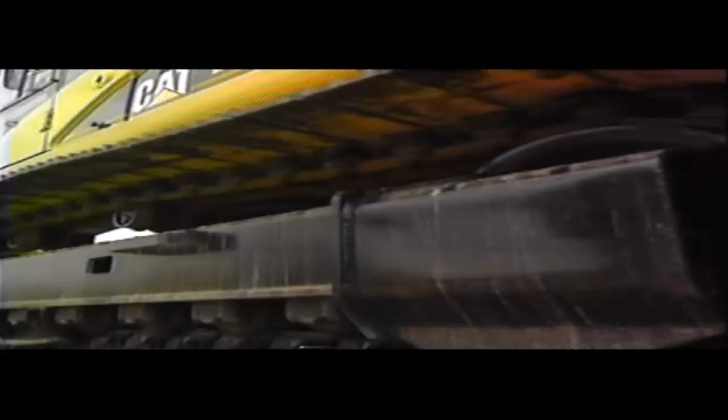Máquinas modernas. Nosso mundo industrializado depende da hidráulica. Mas ela é tão fundamental em nosso modo de vida que mal a notamos. Ela nos levou do Modelo T ao carro moderno, de Kitty Hawk ao Raptor F-22. Ela nos dá força para levantar, guiar e conduzir as escavadeiras que extraem recursos preciosos da terra, e é o segredo por trás da maquinaria que fabrica a estrutura de nossas cidades. A hidráulica nos transporta, nos diverte e até recolhe o nosso lixo.

You look at a lot of applications and we see hydraulics. You think about a car going down the street, of course you have hydraulic power steering, hydraulic brakes. A lot of the roofs on those cars, the convertible tops, are all hydraulic controlled. Get into aircraft, all the control surfaces. Amusement parks, a lot of the rides today, there's hydraulic powered roller coasters.

Go 0 to 120 in 4 seconds.

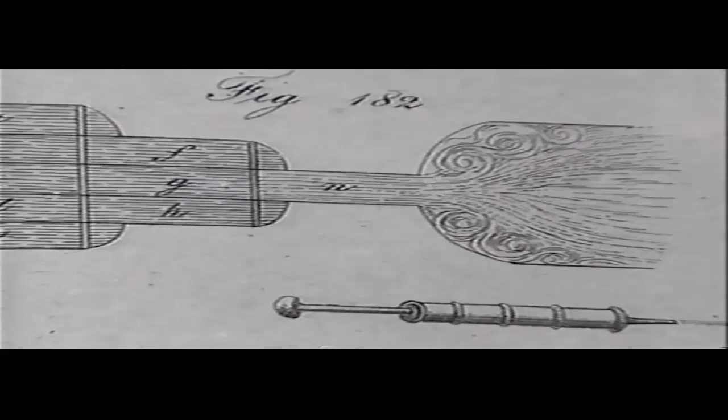A hidráulica é o ramo da física que estuda o comportamento de líquidos em repouso ou em movimento. O movimento dos líquidos é chamado de hidrodinâmica. Engenheiros civis usam essa forma de hidráulica em usinas de energia hidroelétrica, manipulando o fluxo de líquido para impulsionar turbinas. Essas usinas fornecem eletricidade para mais de 1 bilhão de pessoas no mundo.

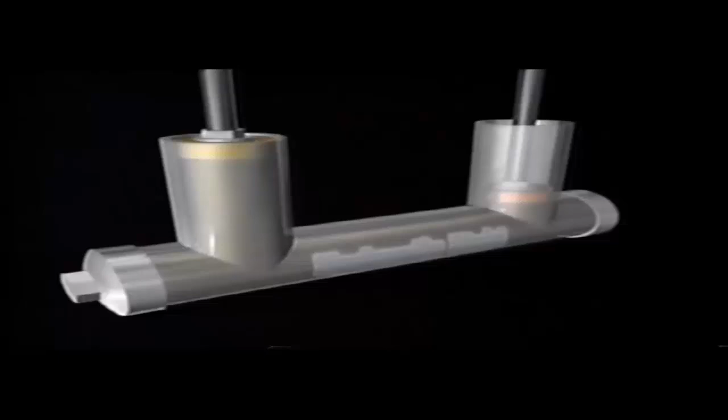O segundo tipo de hidráulica, líquido em repouso, chama-se hidrostática. Engenheiros mecânicos usam essa forma de hidráulica para produzir força através da pressurização de líquidos incompressíveis. Se você tem 2 pistões em um sistema hidráulico fechado, qualquer força aplicada ao pistão A será completamente transferida para o pistão B. The power of your blow is transferred to the other plunger by hydraulic transfer of power.

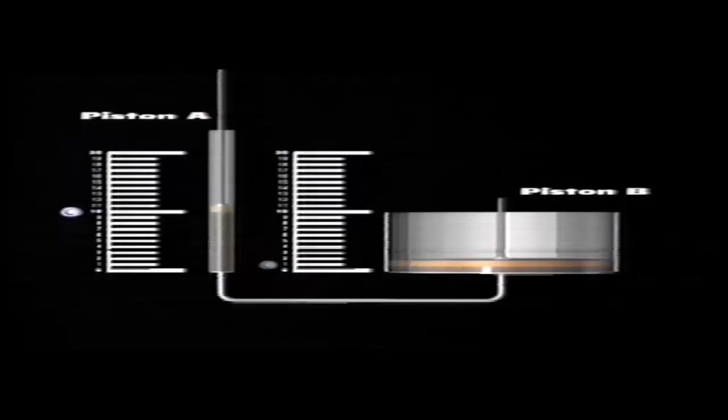Uma das vantagens de um sistema hidráulico fechado é a possibilidade de multiplicar a força. Se o pistão B tem uma área de superfície 10 vezes maior do que o pistão A, o pistão B deslocará uma unidade para cada 10 unidades do pistão A, mas com força 10 vezes maior. Portanto, 50 kg de força aplicada ao pistão A fornecerá pressão suficiente sobre o pistão B para mover um objeto que pesa 500 kg. Notável em sua simplicidade, a multiplicação de força hidráulica é impressionante em sua capacidade, e é o que dá força bruta para quase todas as máquinas grandes.

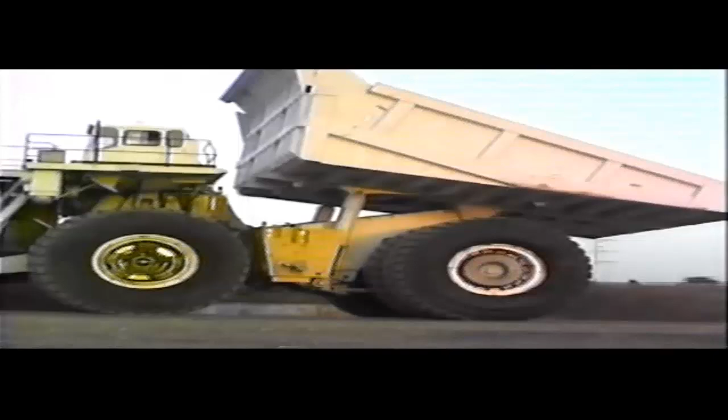In most people's mind, they consider hydraulics the application of high-pressure fluids, generally speaking, to move large amounts of weight and generate a lot of force.

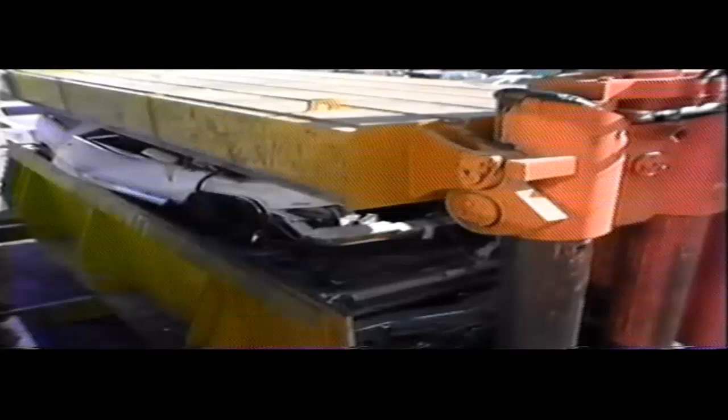Some of the more impressive applications of hydraulics are just pure raw hydraulic force. You look at car crushers as an example. It's unbelievable. You take 5 or 6 cars piled vertically and they're smashed to just feet. And you have to say, how is that done? It's hydraulics.

Um dos instrumentos mais comuns que utiliza a multiplicação de força hidráulica é o macaco hidráulico.

When you push the lever up and down, you're actually pushing on a small piston, which pushes hydraulic fluid, and this fluid flows into a larger piston. Say the small piston that you're pushing has a surface area of 1 square inch, but the large piston that's actually pushing up your car, that might have a surface area of, say, 10 square inches. So for every pound of force you push with that lever, the hydraulic system multiplies that force 10 times.

Unfortunately, in hydraulics, like in everything else, there's no free lunch. So you don't get it for free. In order to get that to work, you have to pump 10 times the amount of fluid.

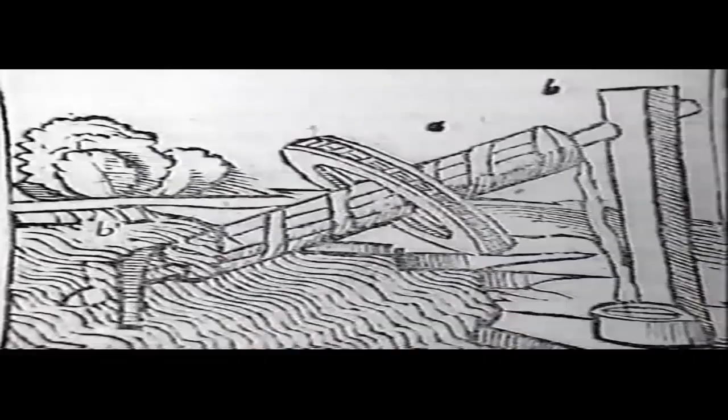Embora os princípios básicos da hidráulica pareçam simples, muitas mentes brilhantes levaram milhares de anos para compreender completamente o poder inerente do líquido. Os gregos, no ano 250 a.C., foram uma das primeiras sociedades a procurar modos de controlar o fluxo de água, inventando muitos dispositivos hidráulicos. Alguns eram criados para diversão, como este que forçava o ar para fora de um pequeno tubo arqueado, produzindo o som de um pássaro. Outros eram mais úteis, como o relógio de água.

O grego que deu a contribuição mais duradoura para a hidráulica foi o matemático Arquimedes, que descobriu o primeiro princípio da hidrostática, a flutuação.

His buoyancy experiment was basically based on the concept that a material that is submerged in water experiences a force against gravity, and that force is known as buoyancy. He also was the same inventor who said, if you give me a lever long enough and a place to stand, I can move the earth. Fundamentally, that's the principle of levers. And realistically, that's what we're doing with hydraulics on a daily basis.

Em 30 a.C., o Império Romano havia cruzado as fronteiras da Grécia, mas em vez de destruir a sociedade grega, os romanos aprenderam com ela, melhorando várias invenções, inclusive a roda hidráulica e o aqueduto.

The Romans realized that they had to feed bigger areas, so they had to have a system where they could carry large quantities of water and at the same time use the concept of gravity.

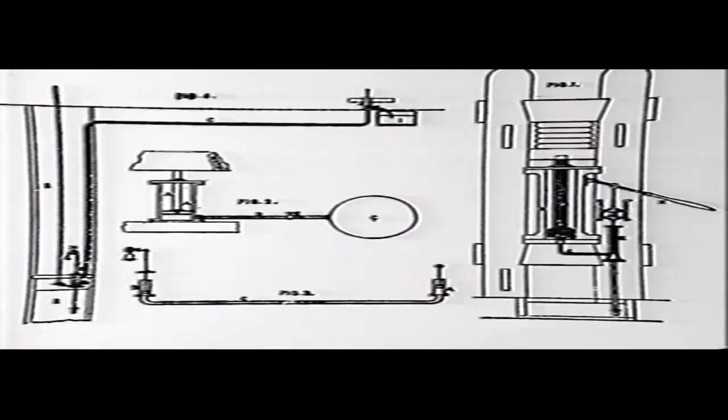When the first hydraulic systems were used around the 1800s, they did use water as the hydraulic fluid. And water does not make a very good hydraulic fluid. Some of the problems it has: it's very thin, so it leaks past your seals. Back in the 1800s, the seals they had were things like leather and ropes and things of that sort. So if they did seal, they didn't seal for very long.

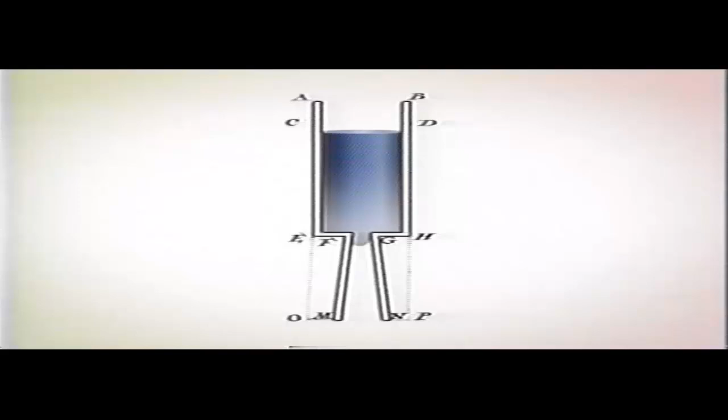The pressures were on the order of 800 pounds per square inch to 1,000 pounds per square inch. It's 1,000 pounds per square inch blasting against raw earth. You clean the soil away in a hurry.

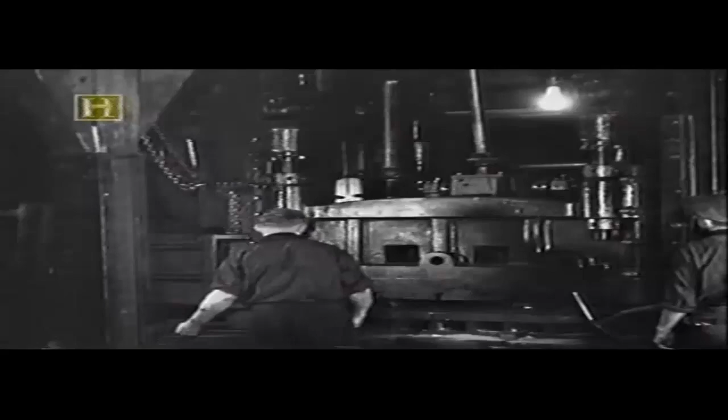Hydraulics played a crucial part in enabling vehicles to transform from the hay wagon type of thing to the ever heavier, ever more comfortable, ever more livable vehicles that we have today.

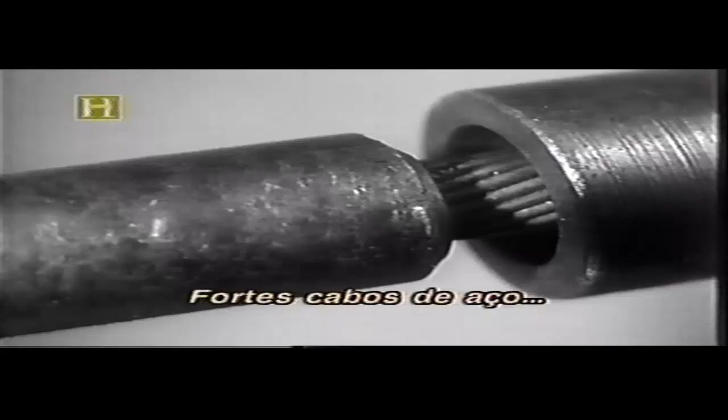Strong steel cables provide powerful, unfailing, and flexible connections between the brake pedal and the brake itself. Of course, as the weight of the vehicles increased and their speed increased, we had to come up with more effective ways to stop these machines.

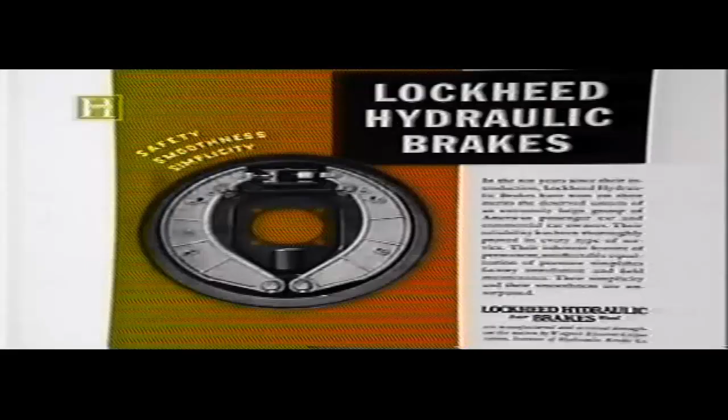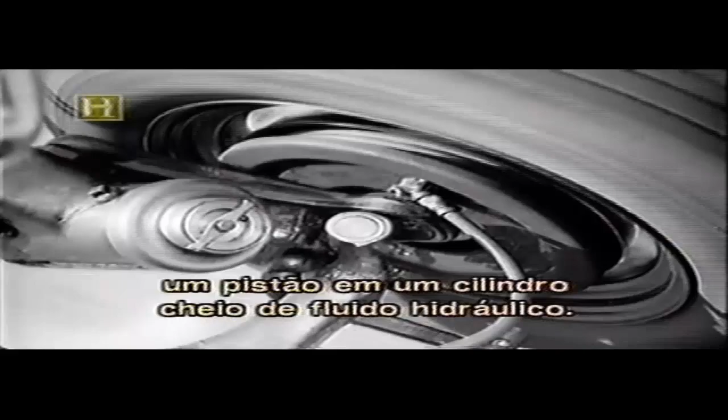The way that the early hydraulic systems for braking worked on cars was your pedal would push on a piston in a cylinder full of hydraulic fluid, and that would push the fluid to each wheel. The fluid would come into another cylinder with two little pistons that push out against a couple of curved shoes that push out onto a cylindrical drum, and when they press on it like that, it creates friction and slows the car down. So suddenly you can transmit a lot of energy to these individual wheel brakes.

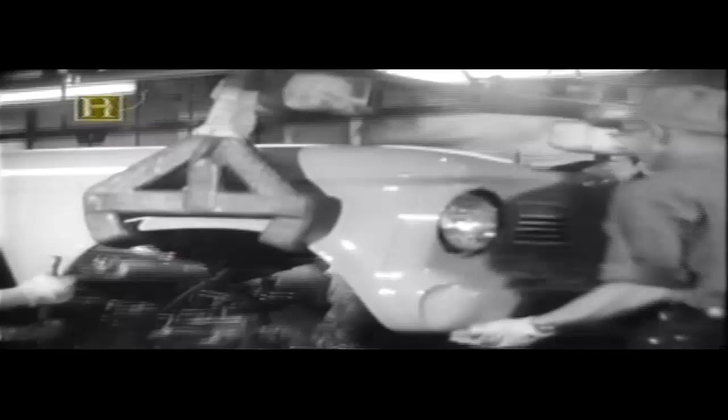Just take a hydraulic pump and have this driven by the engine, and the combination of the hydraulic flow and pressure is what provided the power to turn the wheels to the left or right. If you turn it to the left, all it does is actuate a valve. The valve opens and routes fluid into a piston, which would turn the wheels to the left. So power steering became an absolute godsend.

And the early ones, they wanted to make themselves known. And so your power steering would be totally zero effort. I mean, you could steer these gigantic cars with your pinky finger.

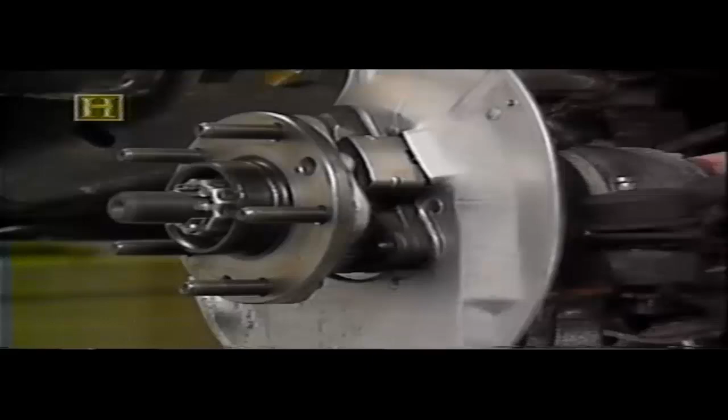Desde o advento da direção e dos freios hidráulicos, seus sistemas permaneceram basicamente os mesmos. Os freios modernos são complementados com o auxílio do vácuo, possibilitando parar mesmo um grande furgão com apenas um toque do pé. A direção hidráulica também possui controle eletrônico que aumenta o fluxo do fluido com base na velocidade em que o volante é girado. Modernas aplicações hidráulicas para o automóvel concentram-se no estilo e no conforto do motorista.

You can suspend a car with metal springs, but you can also put a piston there with hydraulics to get the same type of springing effect.

O cálice sagrado da suspensão é controle ativo de carroceria, encontrado apenas em carros luxuosos como o Mercedes-Benz CL Coupé. O controle ativo da carroceria mantém o carro estável e alinhado, mesmo nas curvas mais fechadas ou na mais irregular das estradas. O sistema funciona colocando-se um êmbolo hidráulico no topo de uma mola de suspensão. Se o carro passar sobre um buraco, em milésimos de segundo, sensores localizados no carro todo ativam o êmbolo, fazendo-o se estender e equilibrar a carroceria.

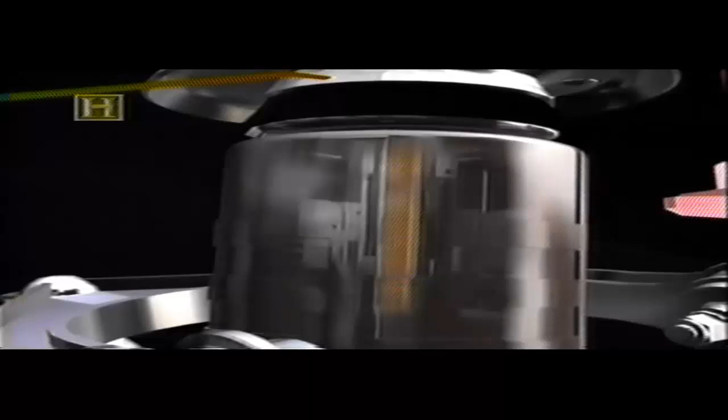Mas talvez sua característica mais extraordinária seja a capacidade de mudar a suspensão. Quer a sensação de um carro esporte? Basta apertar o botão e a hidráulica fará acontecer.

Embora a invenção dos freios hidráulicos e da direção hidráulica tenha ajudado a indústria automobilística, o impacto que essas inovações tiveram na indústria da construção civil mudou a face da Terra.

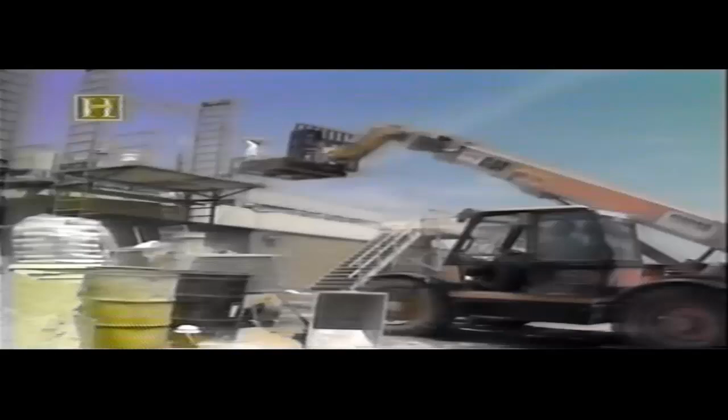O maior exemplo da força bruta que a hidráulica pode fornecer encontra-se na construção civil. Ao longo dos anos, as escavadeiras, guindastes e caminhões que construíram nosso mundo aumentaram de tamanho exponencialmente, alcançando eficiência e força inigualáveis através da hidráulica.

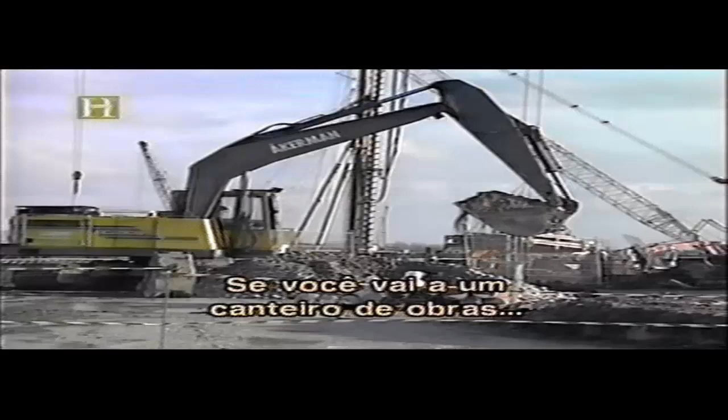If you go to a construction site, you can't help but see hydraulics. It's everywhere. It's in virtually every machine that's on a construction site. And in many cases, probably most cases, it's because there's just no better way of doing it.

Neste armazém, em Youngstown, Ohio, a companhia Robbins dá os toques finais em duas gigantescas máquinas tuneladoras. As brocas têm quase 120 metros e pesam 800 toneladas. Para mover algo tão grande, só havia uma alternativa.

The amount of force we get from the hydraulics far exceeds what we can get from electrics without going into great cost. Hydraulic gives you more force and power, especially in these type of machines. You need that force to cut the rock as hard as it can be sometimes.

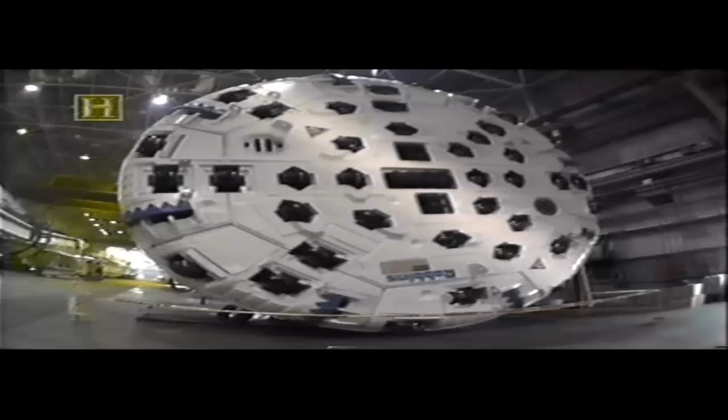Quando a broca é ativada, 3.000 galões de fluido hidráulico percorrem 11 quilômetros de mangueiras para centenas de componentes hidráulicos. O sistema hidráulico é capaz de mover os pistões da broca com 5.000 libras de pressão por polegada quadrada.

When we talk about hydraulic pressure, what we're doing is putting force into a cylinder, which in turn puts force against a given surface.

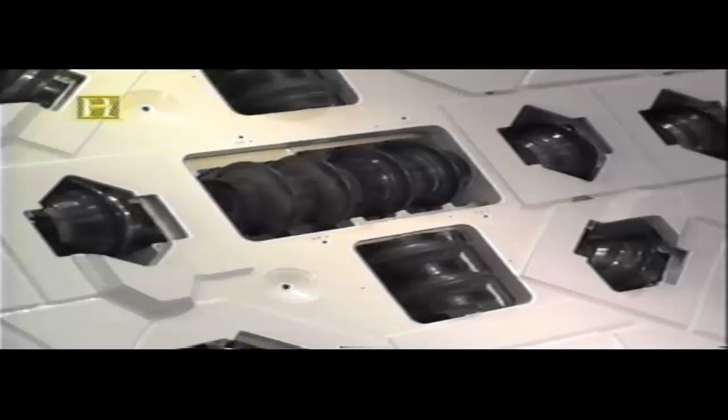Fazendo o corte, uma cabeça com 7 metros de diâmetro, alimentada por 10 motores de 450 cavalos, a perfuratriz tem 46 dentes de 47 centímetros que avançam contra a rocha a um ritmo de 7,5 metros por hora. Embora a cabeça da perfuratriz seja movida a eletricidade, é a hidráulica que torna a perfuração possível.

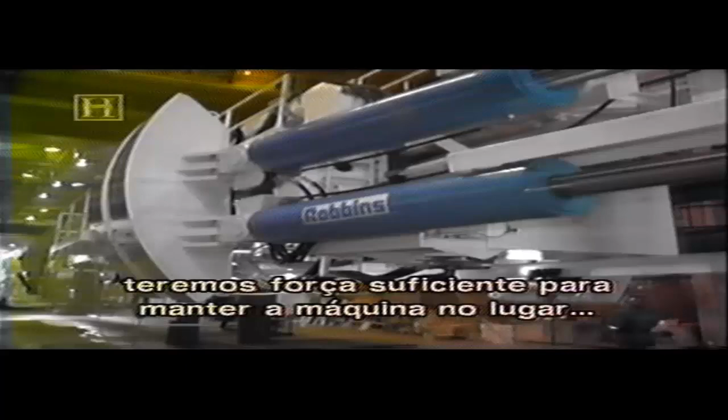Behind me you see some curved items we call a gripper shoe. So if we put 5,000 pounds of pressure on that shoe, that is giving us enough force to hold that machine in place so that it doesn't try to spin in the tunnel.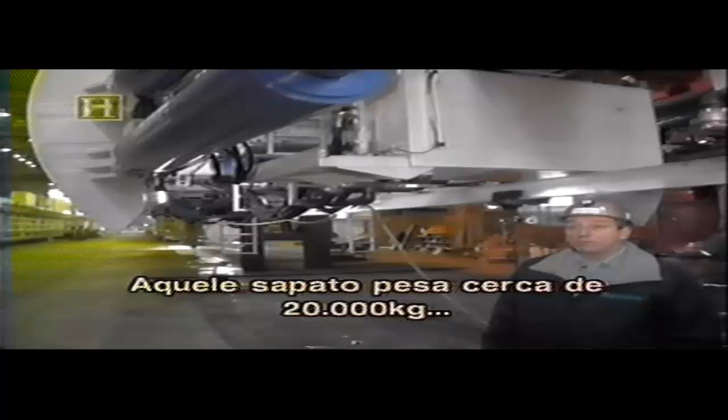A sapata de fixação aplica 2 milhões de quilos de força contra a parede do túnel. Quando a máquina se estabiliza, um segundo conjunto de cilindros se estende, empurrando a broca com uma força de 1,5 milhão de quilos. That shoe weighs about 40,000 pounds, and as it moves very smoothly, as you see, it just shows you how the hydraulics move that kind of weight smoothly and steady.

Após a inspeção, as perfuratrizes gigantes serão enviadas à Islândia para a construção de uma usina hidroelétrica. Incríveis equipamentos de construção, como as máquinas tuneladoras, representam a força inigualável que a hidráulica pode oferecer.

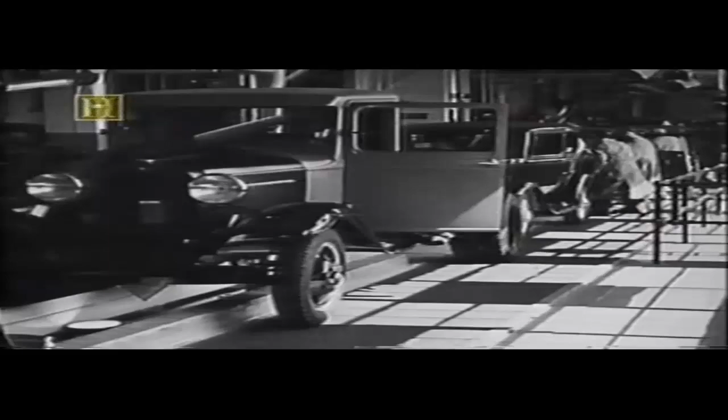Mas a história da hidráulica na construção teve um início bem modesto, com o caminhão de caçamba aberta. Por volta de 1910, ele passou de um simples veículo de transporte para uma máquina que podia carregar materiais volumosos como terra, pedra e carvão.

Colocar esses materiais no caminhão era o trabalho da escavadeira a vapor. E eram descarregados com um sistema mecânico.

The construction industry today relies on the hydraulic cylinder. If you consider the dump truck, the early trucks consisted of a winch and pulley system. The operator had to get out of the cab, wind up this crank to dump the bed of the truck.

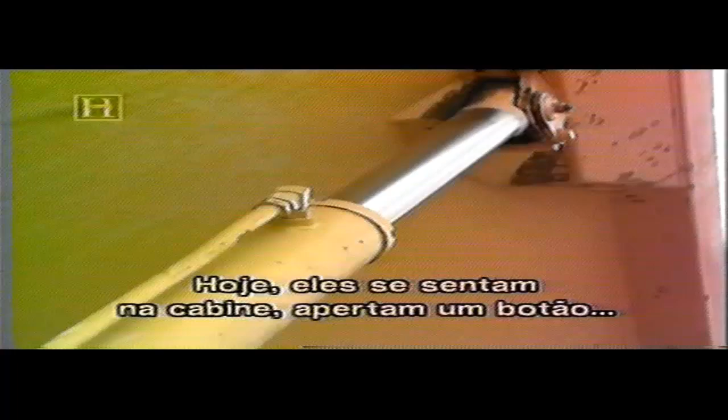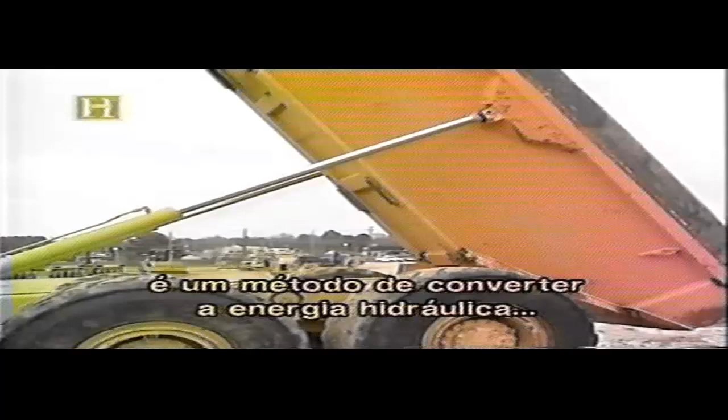Today, they sit in the cab, push a button, the hydraulics extends a ram from the cylinder and empties the bed of the truck. The hydraulic cylinder is a method of converting the hydraulic energy to a workable energy in a back and forth motion. That's really all it does, is it moves in or it moves out.

This is the popular hydraulic type, which operates easily and efficiently under all loads. The end gate is double-acting and is operated by a control nut.

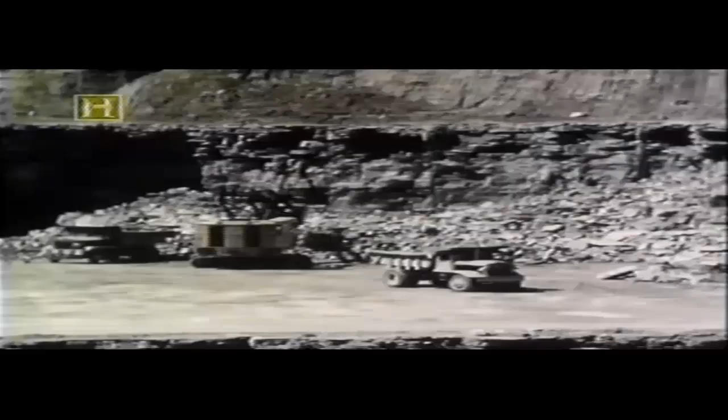The construction industry has to move great quantities of earth. You could have 10 backhoes loading 10 trucks, or you could have one backhoe loading one large truck. And when you did that, you had to move the same amount of earth, so that means the piece of equipment had to be much larger.

The excavator Caterpillar 330 CL. The weight of this arm is in the neighborhood of 10,000 pounds. We'd have quite a bit of problem moving that arm efficiently without the use of hydraulics.

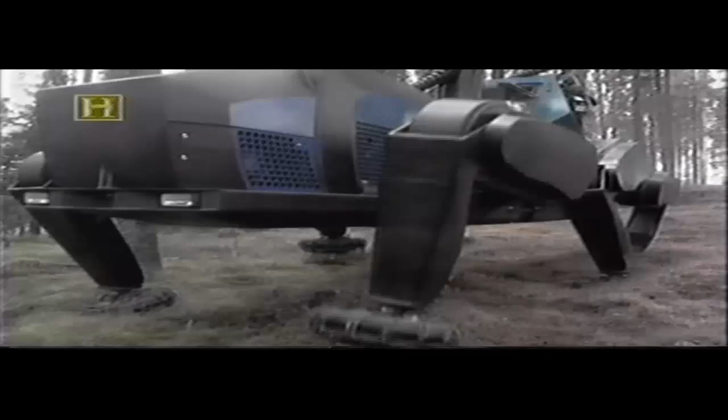Any kind of contamination within the hydraulic system is going to have a devastating effect upon the system itself. The cylinders have a wiper on the end of the cylinder head that, as the cylinder rod retracts, cleans off the excess dirt, so when it extends again, it's as though it were new.

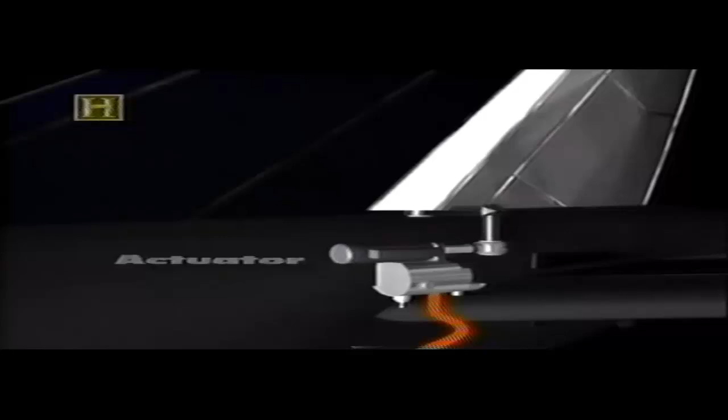The Wright brothers aircraft had no hydraulics on it. Its basis for control was by a lever and cables or pulleys, and this allowed them to have the three axes of control.

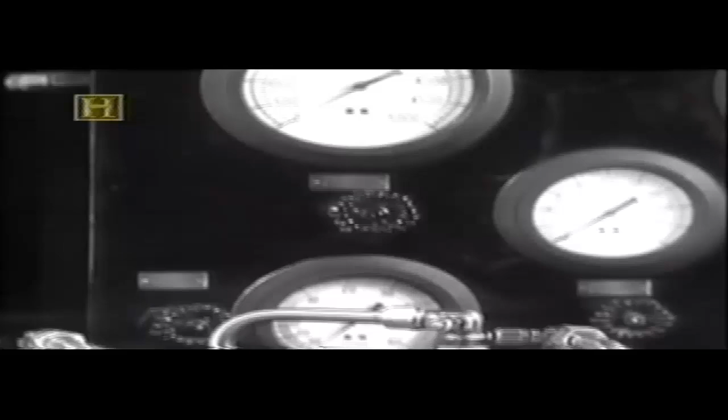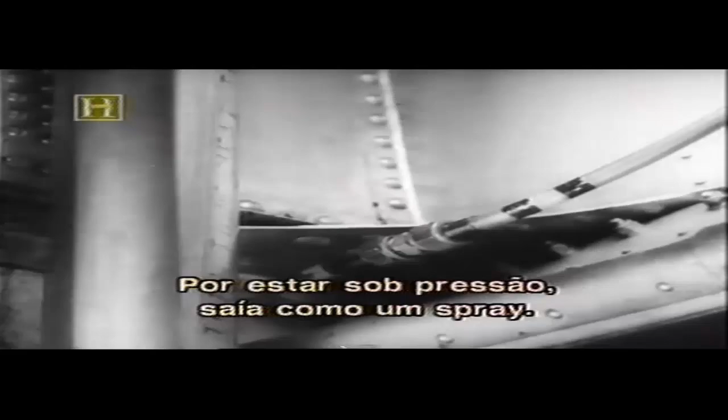If hydraulic fluid would spray onto an engine manifold, it would certainly cause a fire. Many of the fires that you've seen, in general, those were hydraulic leaks that started the fires. Many times a hydraulic leak would not be something you think of with dripping. It's high pressure, so when it leaked out of a hose or a fitting, it would often come out as a spray. If there was a fire already started, the leaking fluid would feed the fire and you'd have catastrophic events.

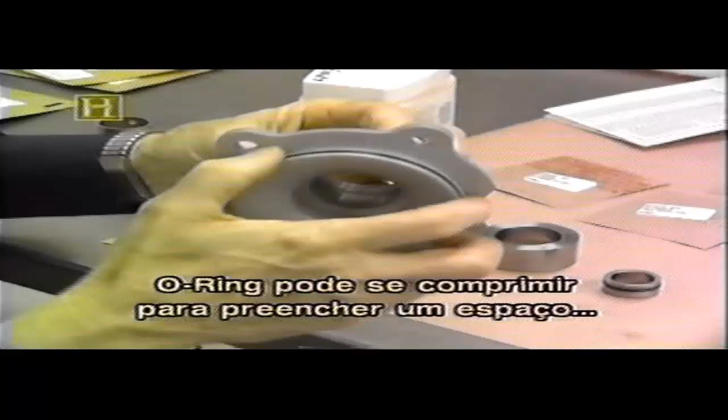The O-ring has a unique ability to be able to compress to fill a space, and it's able to do that very efficiently. It's a donut-shaped piece of elastomer, and it became the seal of choice for most of the products that are in a hydraulic system.

This fluid was a phosphate ester and is still in use today. Phosphate esters are a class of synthetic hydraulic fluids which have very good lubricating qualities. In addition, they tend to be fire resistant.

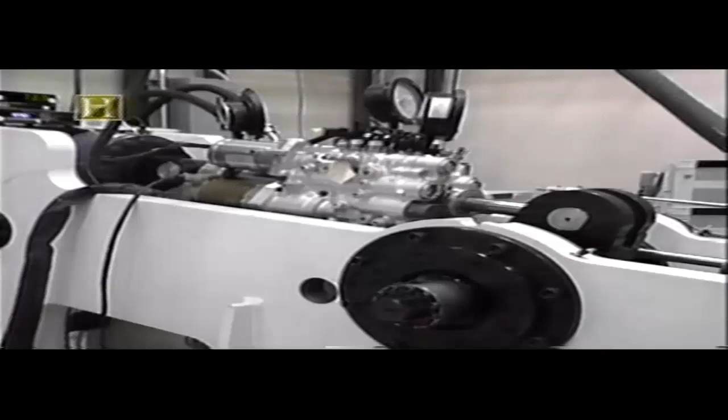O maior avanço da tecnologia hidráulica em aeronaves é o desenvolvimento do AHE, ou atuador hidrostático elétrico. Criado no início dos anos 90, o AHE contém todos os componentes de um sistema hidráulico em um conjunto pequeno.

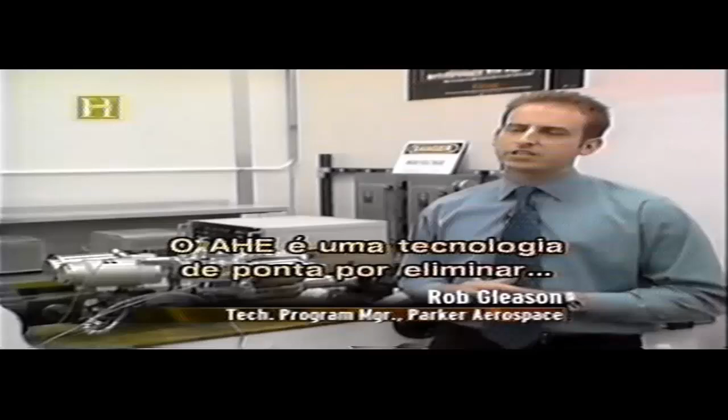Colocando o AHE próximo às superfícies de controle da aeronave, centenas de metros de tubulações hidráulicas e centenas de quilos são removidos. This EHA is considered cutting-edge technology because it removes the distribution elements that are part of a conventional hydraulic system.

There are 2 electric motors that work in tandem. We also have hydraulic reservoirs to capture the thermal expansion and contraction required to power the hydraulic pumps of the system. The linkage here is attached directly to the flight control surface.

A primeira aeronave a usar o AHE no controle primário de voo será o caça F-35.

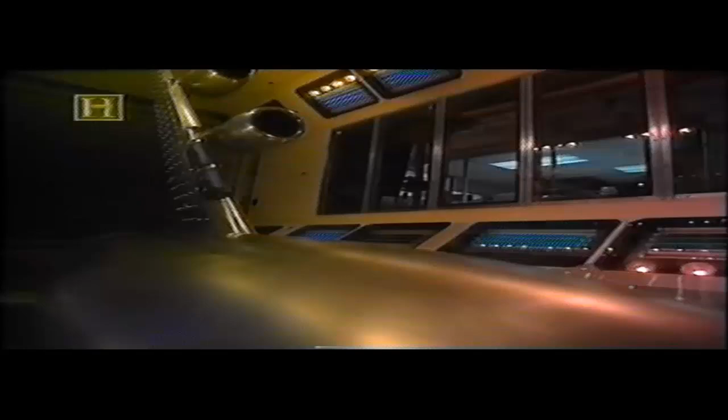A primeira aeronave comercial a empregar o AHE, nesse caso para controle de voo secundário, será o novo Airbus A380. Com 72 metros de comprimento e quase um campo de futebol de envergadura, será o maior avião comercial já construído. A tecnologia hidráulica terá que ser aprimorada para controlar uma aeronave que pesa mais de 300 toneladas.

Certainly, the A380 offered the hydraulic system designer several major challenges. If we were going to use the conventional hydraulic system concept, 3,000 psi, for example, the pumps would be massive, the lines, fittings, and hoses would be massive.

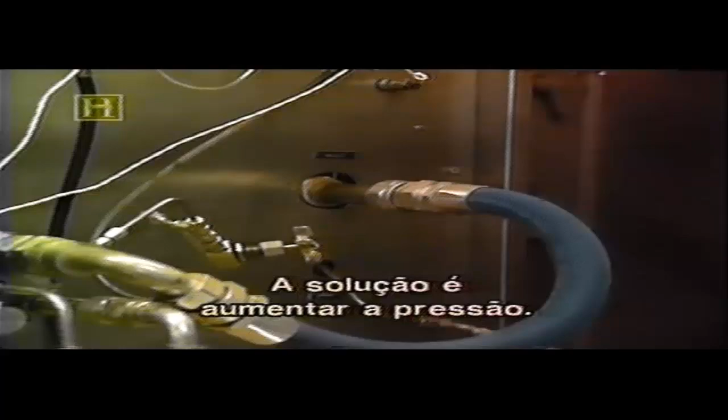A solution to this was to increase the pressure, not from 3,000 to 4,000, but to take it to the next step, 5,000 psi.

Enquanto a indústria aeroespacial continua procurando maneiras de aumentar a eficiência e a segurança dos sistemas de controle de voo, engenheiros investigam a ideia de usar motores elétricos para mover superfícies de controle, eliminando totalmente a hidráulica do controle de voo.

Há, porém, um grande obstáculo à frente. É preciso desenvolver um motor que possa criar a força necessária para movimentar as superfícies com eficiência.

Mas a hidráulica não apenas molda o futuro, ela também dá vida ao passado. A seguir, dinossauros animados com a ajuda da hidráulica.

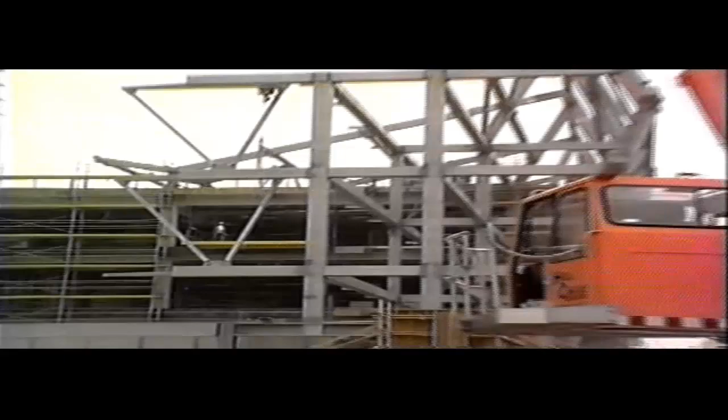A hidráulica não tem um papel apenas em nosso trabalho, tem um papel em nosso lazer também. A Universal Studios, Hollywood, abriga as atrações hidráulicas mais avançadas do mundo. You would not be able to have any of these attractions move this much weight and be this reliable without hydraulics. It just would never happen.

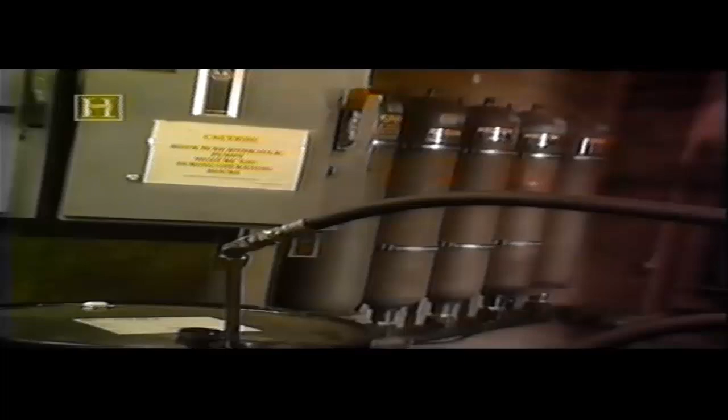Uma das atrações hidráulicas mais complexas da Universal é a simulação de terremoto. Os passageiros que entram neste cenário descobrem como é enfrentar um grande evento sísmico. O sistema hidráulico da atração funciona apenas com 2 motores de 50 cavalos. O sistema envia o fluido através de bombas hidráulicas para uma série de acumuladores que o armazenam sob pressão, deixando-o pronto para cada passeio. Sob o piso do cenário, uma caverna escura abriga dezenas de cilindros hidráulicos. Movendo um piso de 10 mil quilos em movimentos lineares e laterais, os cilindros criam a sensação de um tremor 8.3. Mas este é apenas um dos efeitos hidráulicos da instalação.

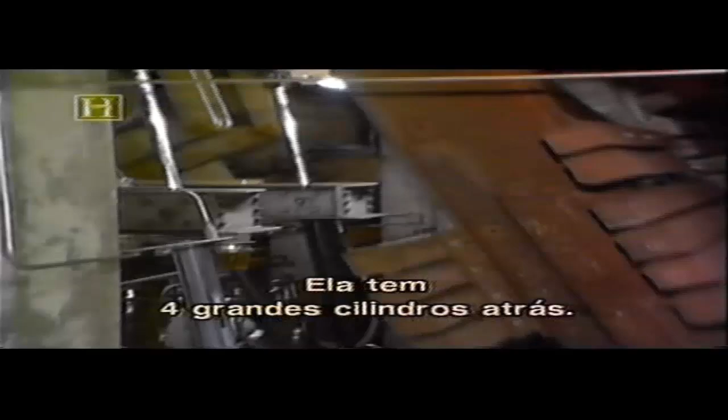As the show's going on, we have a large slab that'll fall. It's got 4 big hydraulic cylinders behind it. It is probably somewhere around 9,000 pounds. And also we have a train that comes out and crashes right in front of the tram. It's driven out by a hydraulic ram.

Quando os passageiros vão embora, os cilindros hidráulicos se retraem, devolvendo tudo à sua posição original. Got to keep the show exactly the same every single time. Earthquakes, hydraulics are very sophisticated.

A atração Exterminador do Futuro 2, em 3D, também utiliza vários efeitos hidráulicos de precisão. Eles controlam as plataformas que levantam e abaixam os diferentes personagens. E também animam os 6 robôs do Cyberdyne, usando bombas de 3.000 PSI para acionar os cilindros da cabeça, tronco e braços.

Mas a instalação que utiliza mais efeitos hidráulicos na Universal é o Parque dos Dinossauros. Os visitantes atravessam selvas pré-históricas, encontrando uma variedade de dinossauros realistas em tamanho natural, incluindo um ultrassauro que usa 15 cilindros hidráulicos apenas no pescoço.

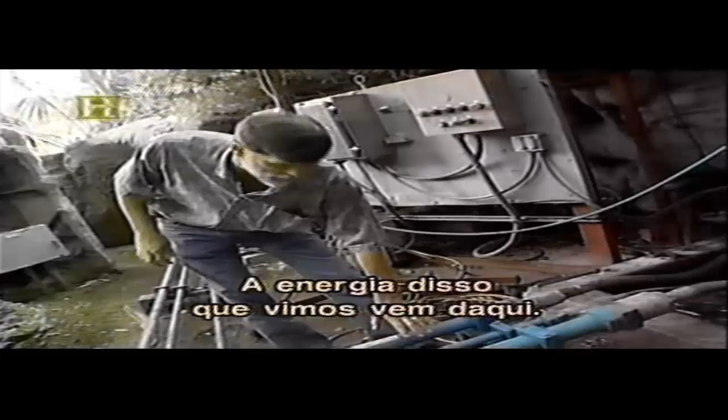This particular figure we just saw, the oil comes in here. This is a pressure line. It's set at 3,000 psi. The hydraulic module here will distribute the oil to the figure itself, which has, the one we saw is just a torso and head. It has 6 separate moves, 6 separate cylinders, and it's all powered by hydraulic.

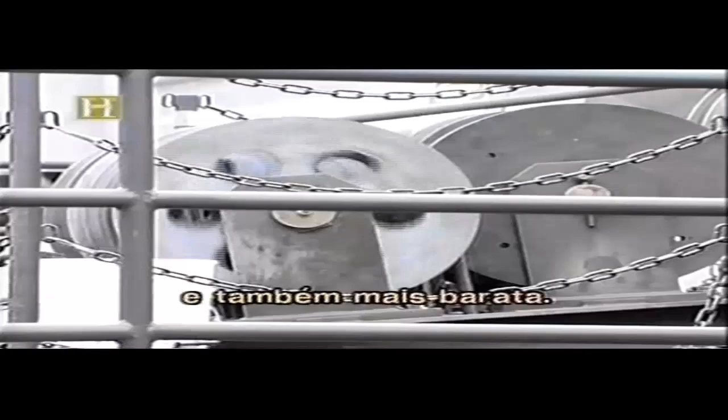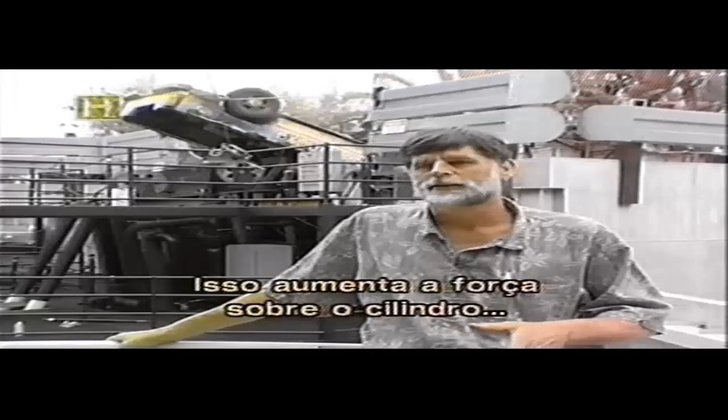Após encontrar vários dinossauros, a atração revela mais uma surpresa. We use hydraulics on the falling car for 2 reasons, really. It's more controllable than any other kind of power, and it's also less expensive energy-wise. The cylinder is actually hooked up to a block and tackle. What that does is that increases the motion of the Jeep compared to the cylinder. The Jeep will move 32 feet, while a cylinder will only move 9. So all we need is a 9-foot cylinder to get that much movement. That increases the force on the cylinder, but the hydraulics overcomes that, and it's no problem at all.

E temos o Waterworld, que usa uma catapulta hidráulica para lançar um avião de 700 quilos a 20 metros de distância dentro de um lago artificial. E aqui temos Bruce, o tubarão. Com tantas atrações hidráulicas, não é surpresa que os carrinhos da Universal também sejam hidráulicos.

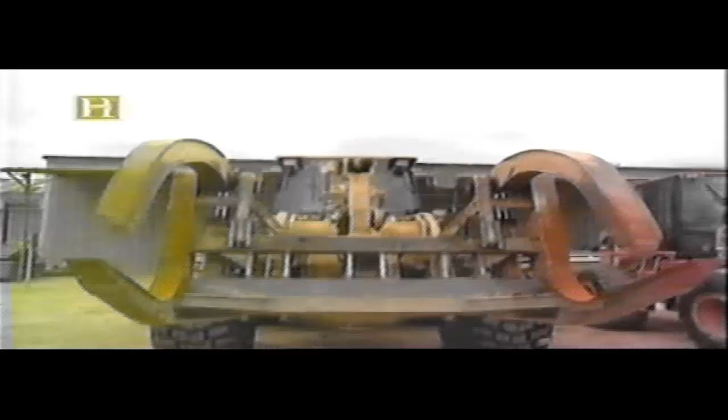No entretenimento ou na construção, quando algo grande precisa ser movido, a hidráulica ainda é a força mais indicada, pelo menos por enquanto. Mas o avanço dos sistemas eletrônicos pode levar à substituição da hidráulica por motores elétricos como a principal fonte de energia na aplicação de forças.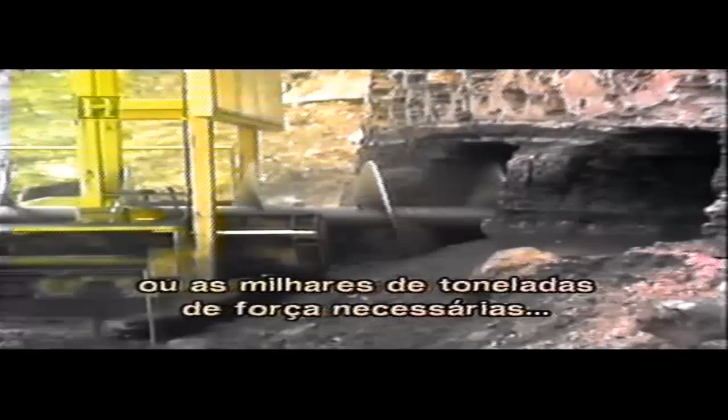I believe the future of hydraulics is a combination of electronics and hydraulics. In some applications, hydraulics may be phased out, but we will never see the power density from the electronic systems that we see in the hydraulic systems. Just can't fathom any other technology that will be able to generate hundreds of thousands of foot-pounds of torque or thousands of tons of force needed to drill a hole into a mountain or under a lake.

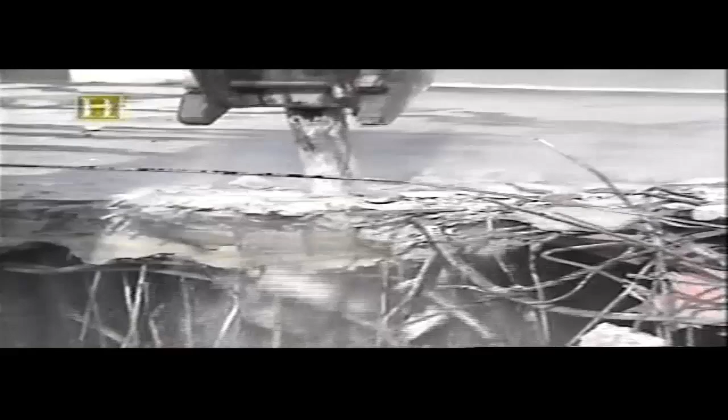Talvez a hidráulica seja suplantada por outra aplicação, mas até que este dia chegue, quando algo grande tem que ser deslocado, quando é necessário muita potência. Com controle preciso, a hidráulica continuará sendo a melhor escolha.